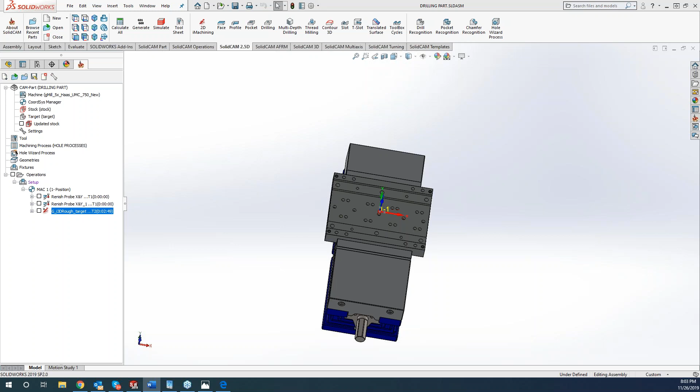Not too much exciting stuff with drilling, but we're going to try to cover as much as we possibly can to make it as clear as possible for everyone. With drilling, you'll see that we have several different styles of drilled holes right here.

We have a tapped hole. Let me get back over to SolidWorks here. So we have a tapped hole, we have some quarter inch drilled holes, some 5/16 holes, some 13/64, and then some quarter inch reamed holes and some 17/64 holes.

So kind of going through everything, with SolidCAM drilling that's going to include your spot drilling, your reaming, your tapping. All that is going to be under the drilling operation for you.

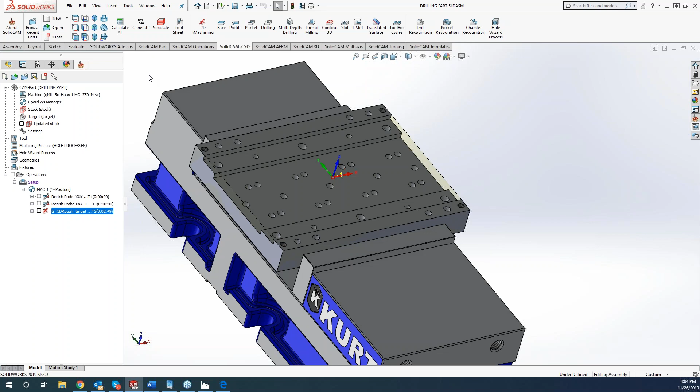So what we'll do is we'll just start off with drilling. Before we get there, you can see we've got my vise here. I probed up my part, my X and Y and my Z, and then also machined off all these areas. So we're right up to size now, and now we can start the drilling process.

So a couple different options for you guys here. We have 2D drilling and we have 3D drilling. Now, once we get into thread milling, which will be in two more classes, I'll cover thread milling there. But what they did in 2019 is they made it very easy to go right from 2.5D, 2D, or 3D drilling right into a thread milling operation without having to jump out of your drilling and create a new operation.

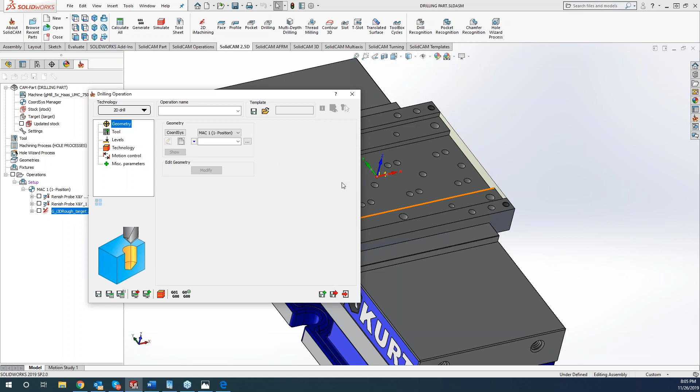So for this part, we are going to be focusing on 2D. We are going to be working on Mac 1 position 1, which is in the center of our part here.

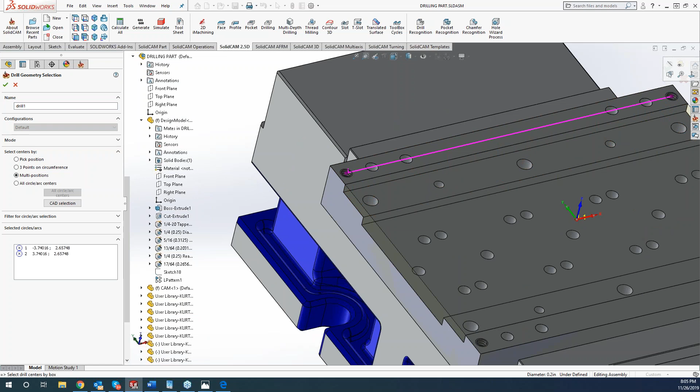Now if I go ahead and grab new geometry, there's a couple different ways we can pick holes. What we can do is come in here and click on each individual hole and grab our holes, and we'll start off with this quarter inch tap first. Or, let me go ahead and delete all these. I can do a filter by size or by radius right here.

I can manually pick a point. So if I wanted to drill a hole right here but there was no geometry, I can just click on that point and it will automatically add that in there for me as well.

So I'll go ahead and delete that one out.

But my personal favorite way, and what I find is the easiest way to go about it, is using your SolidWorks. Usually you will see this minimized up here, so if you would like, go ahead and maximize that down, and come down to your design model.

Now I have all my features that were added in here through SolidWorks. So what I would like to do is grab my 1/4-20 tapped holes, and all I have to do is click on it. I got my geometry here. Click on my 1/4-20 tapped holes, and it will automatically find all of my 1/4-20 tapped holes for me. So I can accept that geometry.

Now I can come in here and modify. I can do shifts for my hole locations, in my X and Y, for each individual hole, or for all of my holes. So if I need to shift these holes by 1/4 inch in my X axis, I can actually shift those over 1/4 inch, and everything will still be linked to it.

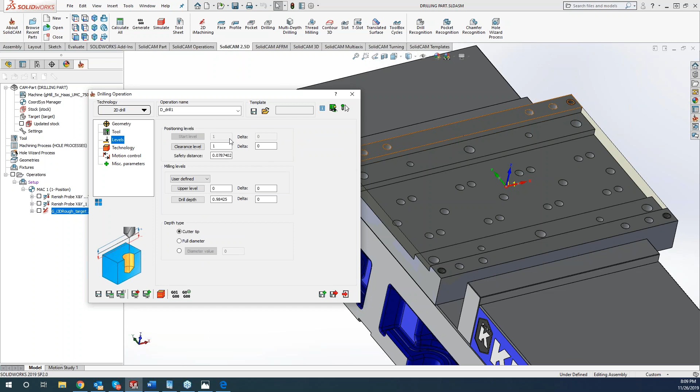Now, our positioning levels we kind of already covered with the face mill profile and all the other ones. But what I like to do in here is, on my levels, my upper level of my part, which is this top piece right there, in my drill depth, since I don't know how deep I want to spot drill out that 1/4-20 hole, I will just put a 0 in there, or I can just click on the surface as well.

Now what I like to do down here at the bottom is, since I know this is a 1/4-20 hole and I want to put a little bit of a chamfer on there, I can come in here and type in 0.27, so we get a little bit of a chamfer on there for when we put our bolts in there and whatnot.

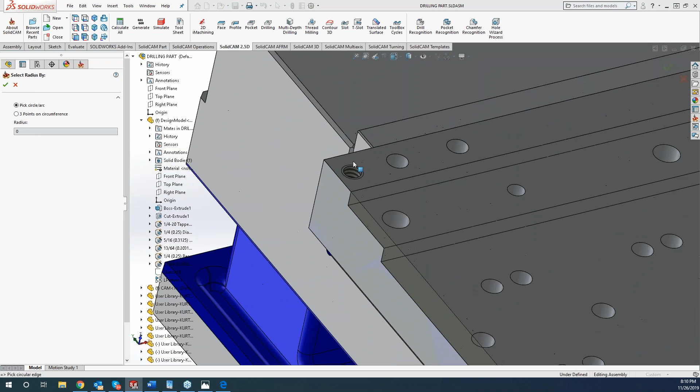So you guys do have the option — if you don't know the value you need to type into that box, but you do have that chamfer feature, you can also use the diameter value button and select directly from the model.

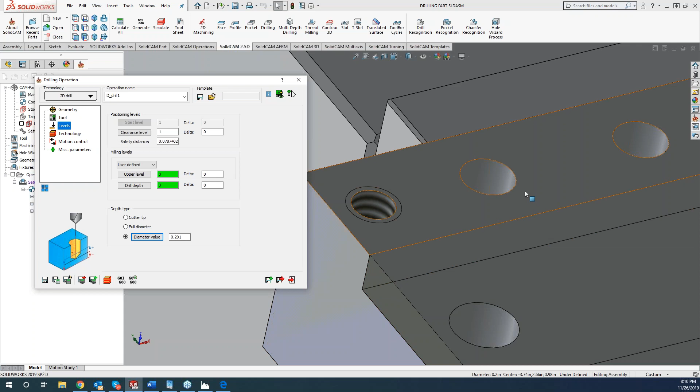So I can come in here and click on the diameter, like Greg said, and it will auto-populate those in there. It's going to go off of the minor diameter, which is our 201 drill. But then you can auto-populate like that. And what Greg is saying is, on one of these other holes, if we actually had a chamfer drawn on there, you can just click that diameter value button right there as well.

Thanks, Greg. We'll do 27. Now, you also have a cutter tip, and I'll cover these shortly, but for right now we're going to tell it to spot drill deep enough to do a 0.27 diameter. Technology, starting over on the left-hand side, this is how do you want it to sort.

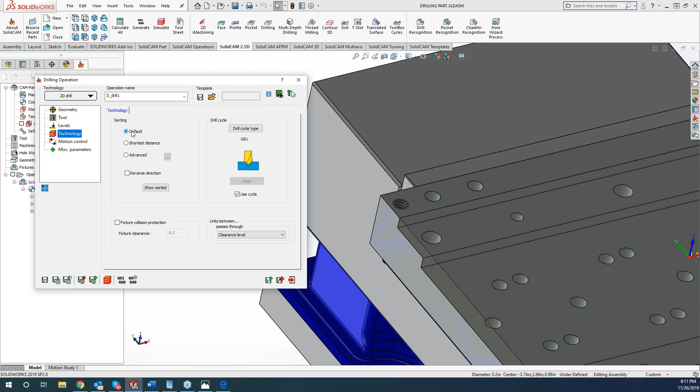So I can do it off a default, and the default is going to go based off of how the engineer drew up the model. So if he chose this hole, then came over here, then over here, and over here, SolidCAM will follow that pattern.

And if you don't like that pattern, we can click on shortest distance, or one I like to use quite often is the advanced option. In the advanced one, I can actually select what pattern I would like it to go, and I can change that tolerance to go tighter or looser to follow the pattern. So we've got kind of a zigzag with a linear pattern, or we can go to the circular patterns right here. So a couple different options to save a little bit of time out on the machine for you.

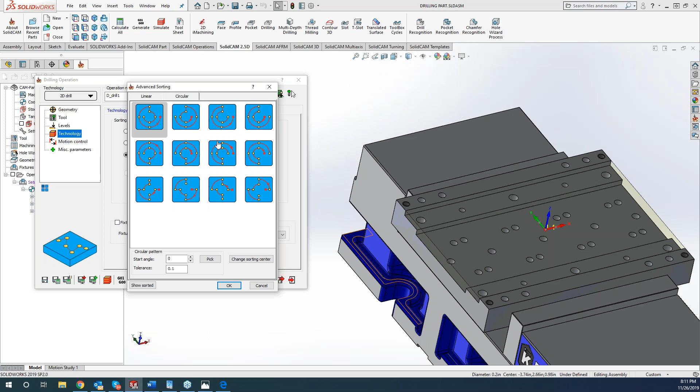Okay, so we'll just go off the default for this one. Now right here, the reverse direction — I'm going to cover that in our next drill operation.

Now here is our fixture protection. So if we have a drill or a holder getting close to that fixture, we can put in a fixture protection. This comes in handy if you're using a vacuum table and you really don't want to drill into that vacuum table. We can put that in there, or for anything to do with your fixture.

Now here is our drill cycles. Depending on the post processor you're using, on your post you may see fewer or more of these options in here. We're using a Haas post for this one.

So I have your standard G81, which is a standard drill cycle. G82 is going to be your dwell. G83 is going to be a peck drill. And your G73 is going to be a drill with a chip break. So for this one, we're just doing a standard spot drill, so we'll do a G81.

Now between my passes, it's going to go up to the clearance level, but I can change that down and lower it to my safety distance, which is being read by your levels right here. So we have a safety distance of 78 thou, or we can have it go up to the clearance. If you guys are looking for high production, I would definitely check that out right there — just make sure you're not going to hit anything as it's going across your part.

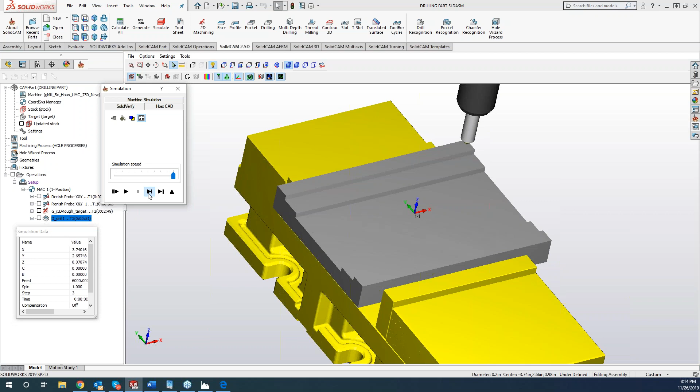So we have our fixture in there, and I can single-step this through. I'm happy with the pattern, and our location is all good.

So now, since I already did a spot drill, instead of having to go through and repick all the geometry again and redo everything for my quarter 20, what I can do is simply come in here and make a copy.

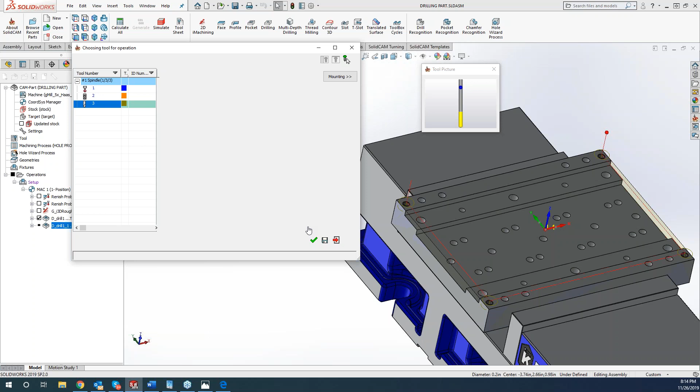Now what I'll do is come and grab the drill that I need. For this quarter-20 hole, I'm going to grab that drill. Now, this is another cool feature: if I'm not sure what that hole or a quarter-20 tap is supposed to be for a drill size, all I have to do is highlight that number and click inside that diameter, and it will auto-populate the correct drill size for me. Pretty nice to have that in there.

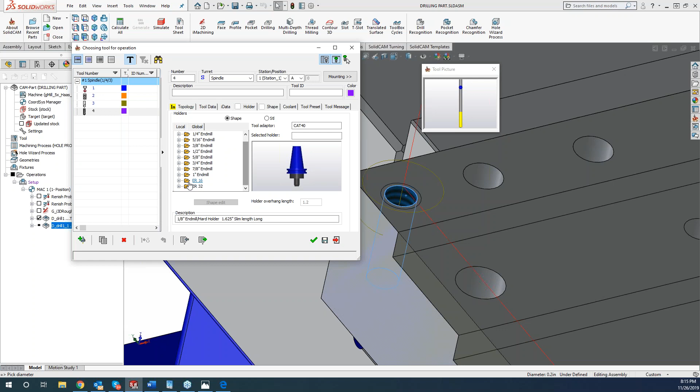We'll go ahead and grab a holder here, and we'll use an ER32. I will uncheck my center drill, and then we will go to our levels. The only thing I need to change up on my levels is my drill depth and my diameter value.

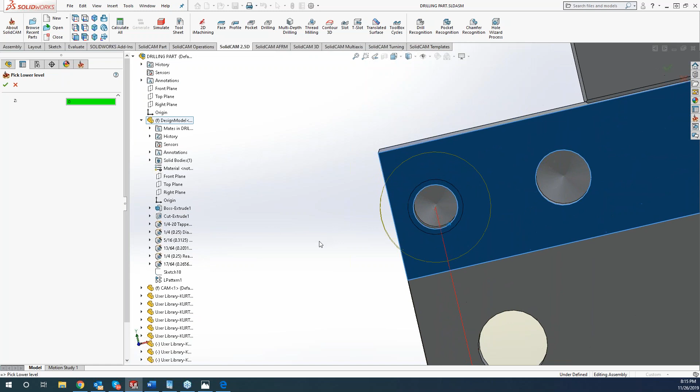If I click on drill depth here, this one does not go all the way through, but I have a good clean point, my drill point right there. So I'll grab that and tell it to use the cutter tip versus the full diameter value. It does all the calculations for you based off the angle, the tip angle, and all that stuff auto calculates for you.

Now in the technology, we'll say that we're cutting some harder material here, so we'll do a pecking cycle, which is a G83. I'll tell it I'd like a peck of 100 thou. Depending on your post, you may have more or less values in here. We can set up our Q peck, set up a first peck, set up a reduce amount, dwells, all that in here.

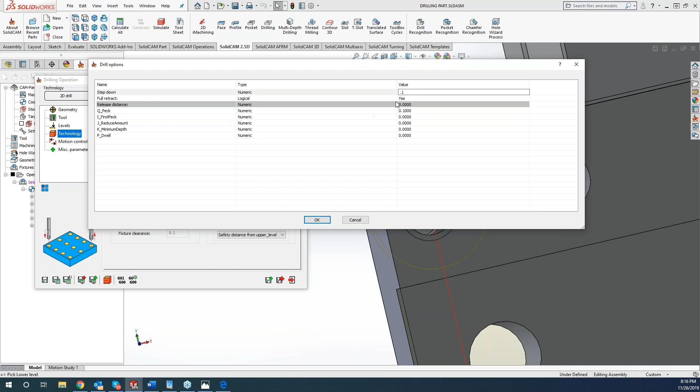Now if you'd like to see the pecking cycle inside your SolidVerify, you'll need to also add this for your step down. The step down won't affect your G-code at all, it's only showing for your SolidVerify. Okay, so now we're doing a pecking cycle.

Now, when it started spot drilling, we started in this top corner over here, went this way and back around. If I do save and calculate again, the drill is going to come over again and drill, drill, drill. But to save a little time, I can reverse the direction. So instead of the table having to move that distance, I can do reverse, and the table won't even move after the tool change.

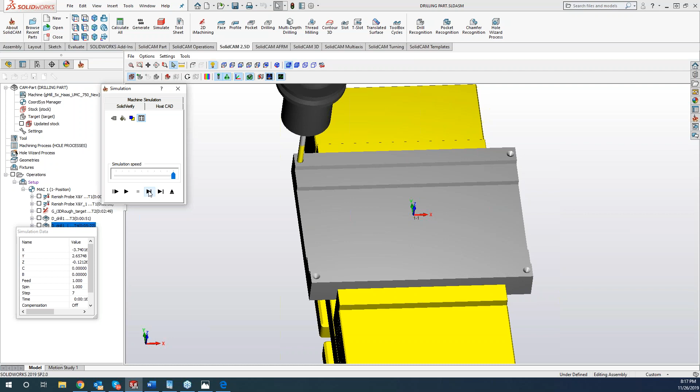So now if we go ahead and do a simulate here, you'll see it left off on the last operation of that spot drill. A little too fast there. So now we can see it spot drilling. I can see I really don't have to worry about my fixture or my tool holder at all. And we're good to go.

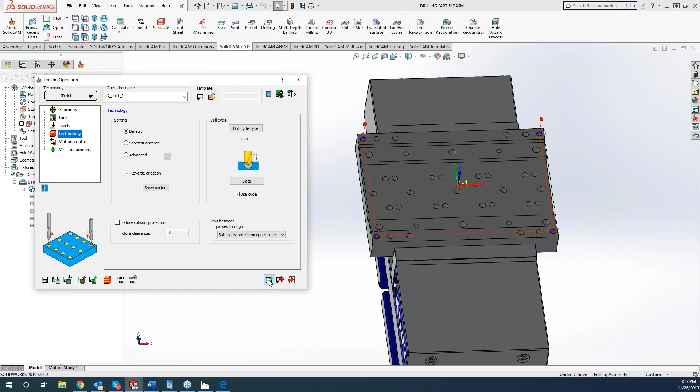So now all we have left is to add our tap in there. What we can do is make another copy, and we will change our drill to a tap. We'll grab a new tool, a tap, and we are doing a 1/4-20, and we'll go ahead and grab a holder here.

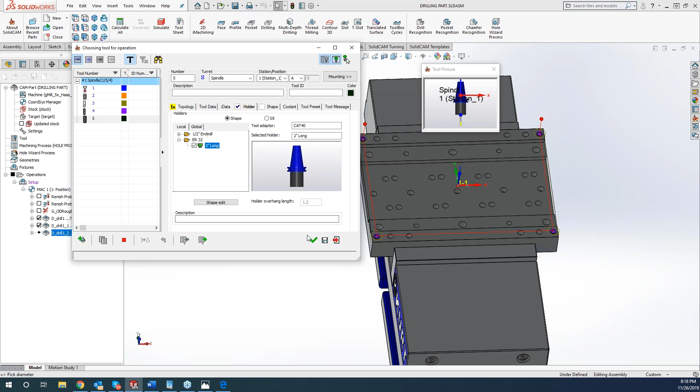Now the only thing we need to change is our drill depth. Obviously I don't want the tip of that tap to go to the exact same point as the tip of my drill. So what I can do is zoom in here and click on the outside edge. That gives me a little bit of room in there for chips that get underneath to compact, so we have the entire drill bottom to compact chips there.

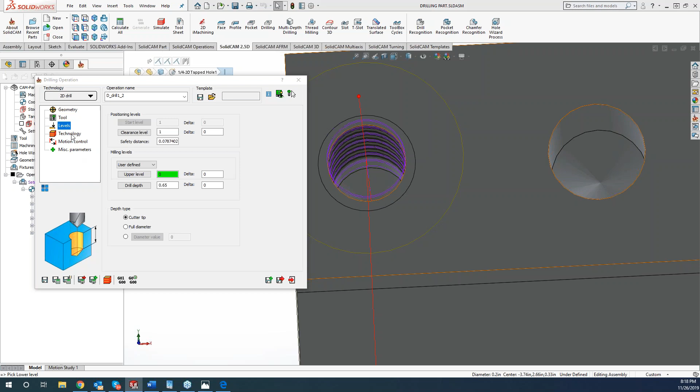Once again, I'm going to reverse my order to save a little bit of time. I'll uncheck this now, and we can have a G84 pecking tapping cycle with this one, and save and calculate. I'm going to hop out of here and play all three of these through so we can get a good simulation of what's going on.

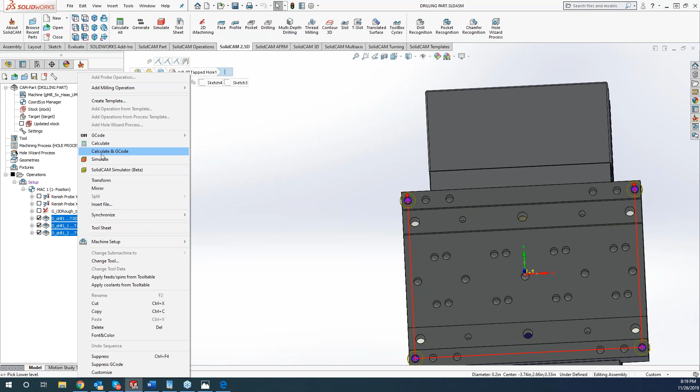All right, so we're spot drilling. We're drilling. Pretty exciting stuff, guys, isn't it?

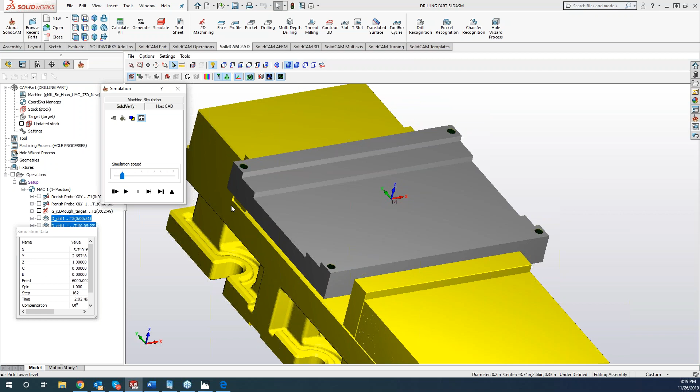And now we ran our tap through. If I look at this, I can see I got a nice little chamfer for my thread relief on there. I saved myself a little bit of time by keep reversing the direction. Pretty nice and simple to do that.

Now I'll go ahead and turn off that toolpath. We'll grab our just regular 1/4 inch. What we can do is either start right from my spot drill and add a new operation, or add it at the end, and then we can combine all the spot drills together at the end. So we'll go ahead and do a drilling again.

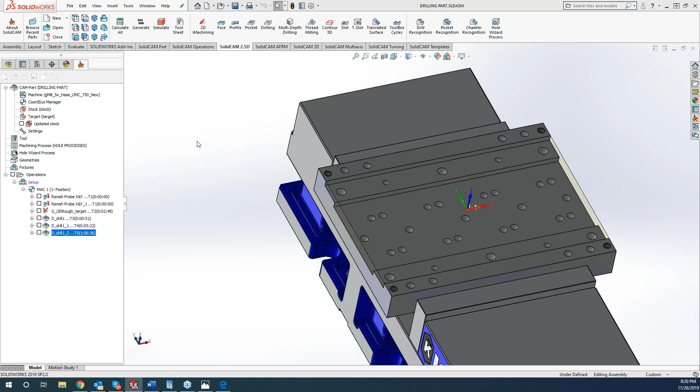What I'm going to do is work my way right down the list. So I'm going to grab my 1/4 inch holes. That one doesn't say reamed, so I don't have to worry about it, I can just do a spot drill and a drill. I'm going to reuse that spot drill that I used before.

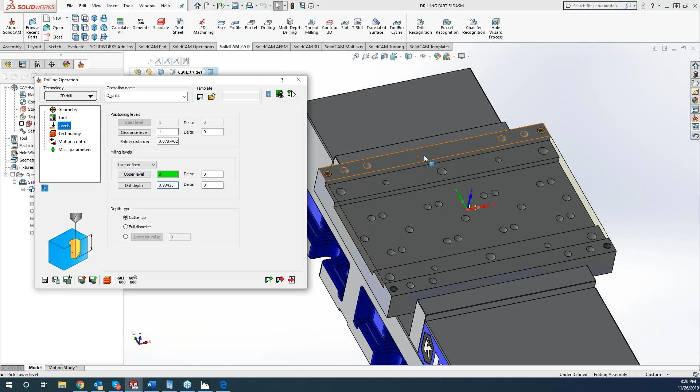Now my levels, my upper level is going to be 0, my lower level will be 0. And I would like to do a 0.26, which gives us a 10th chamfer on there. Save and calculate, and then I can come in here and do save and copy.

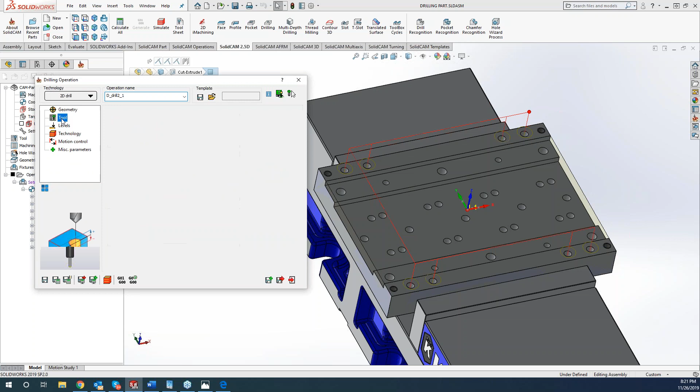First thing I will do is select and add a drill. Like I said, if I don't know the size of it, I can just click on the diameter of the hole and it will auto-populate for me there. And we'll go ahead and throw a holder on there.

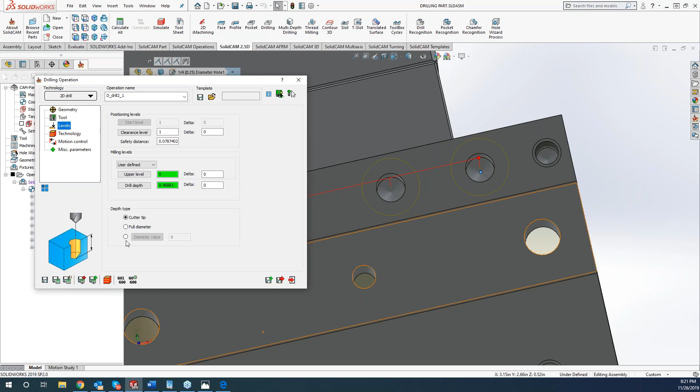Now, with that level, I want to drill right to that tip. There we go. Now, another way of going about that, since I have a nice clean view of my full diameter, I can also turn it to full diameter and grab that depth as well. You're going to get the exact same calculation there.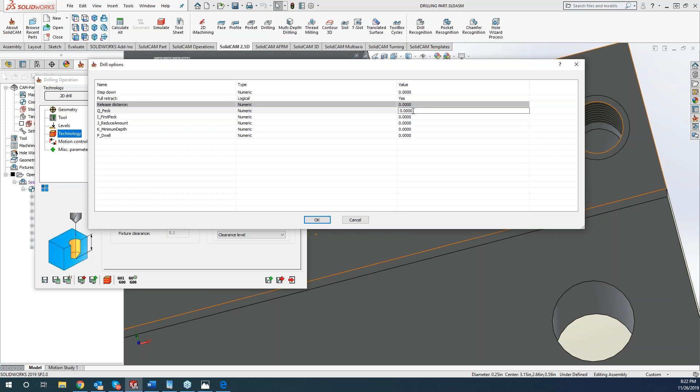Technology-wise, we'll go ahead and peck it out, and I'll do 100 thou peck. And I will reverse the direction to save us a little bit of time here. Now, I just want to double check my spot drill real quick to make sure I had that center drill turned on. Yep, so I'll turn that center drill on. There we go.

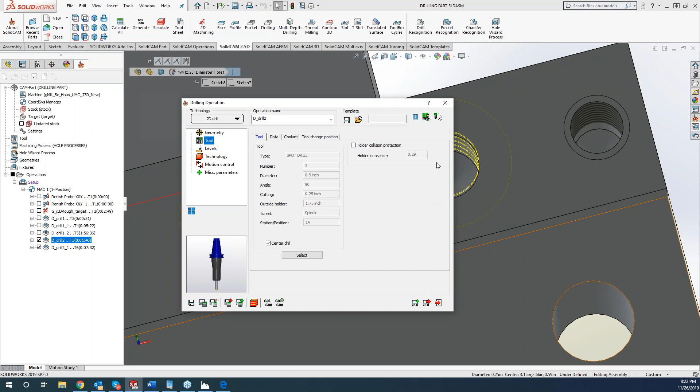All right, so we have those holes done now. Once again, we can start our drilling operation and we'll just keep working our way down the list here. So now we can go to our 5/16.

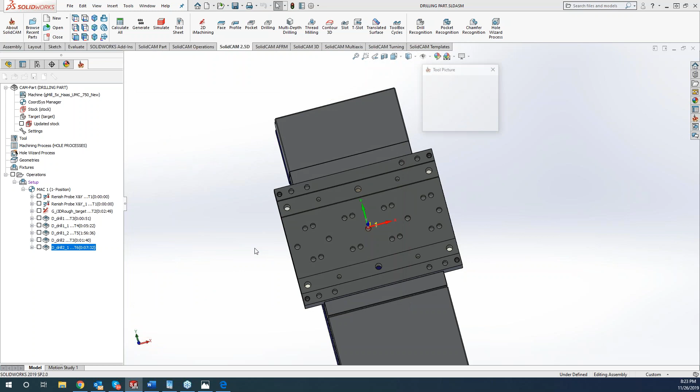Since that one has been machined off at a lower level, my upper level for that spot drill and my drill is now going to change. So if I go to my levels, my upper level is going to be this face, my lower level is going to be this face. I already forgot what size I'm drilling, so I'm just going to grab that hole, and we can add an additional 10 thou chamfer on there. Save and calculate.

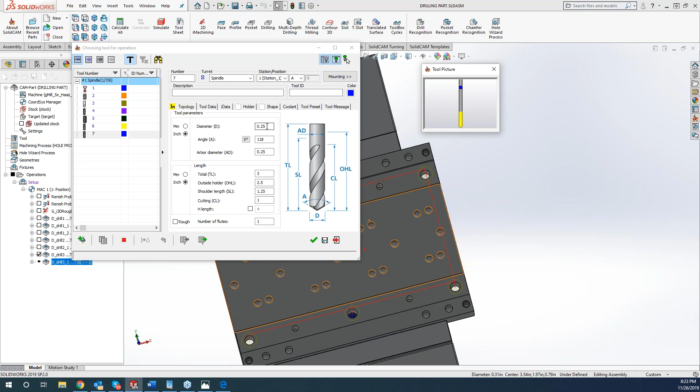And we will make a copy again. Add a new drill. Got our 3125. Grab our holder.

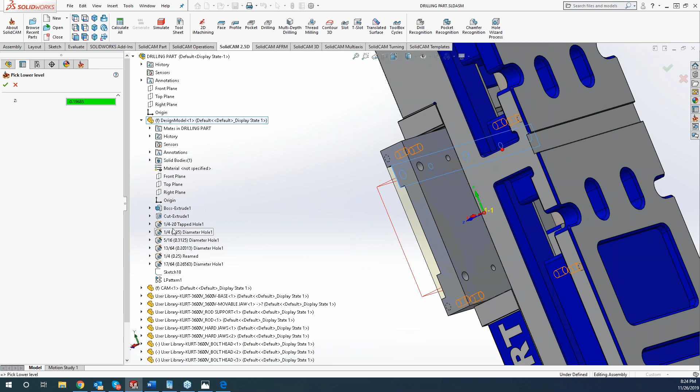Now I'll go to my levels. My thread depth is showing through, so I can just click on the bottom of the part there. Now on this one, I'm definitely going to want to do full diameter, and it's going to go to the full diameter of that drill. But if I do that, I'll sometimes get that plug that's stuck at the bottom, so I'm just going to go an additional 20 thou past. By using the delta, I can go either deeper or shallower, all based off of the delta. You can see I'm showing a negative with the arrow, an arrow down here. So I'm going 20 thou past.

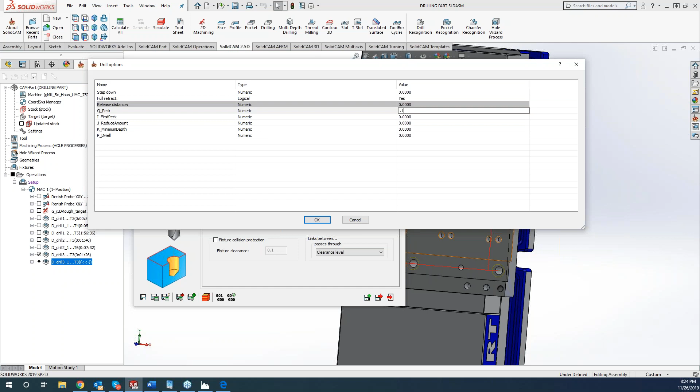Now with this one, we'll use a pecking cycle again. 100 thou seems to be the good number for tonight, so we'll go with that one. And then I will reverse the direction again. Save and calculate. And if we would like to see those two, we can simulate both of them, and you can see our previous operations are still there.

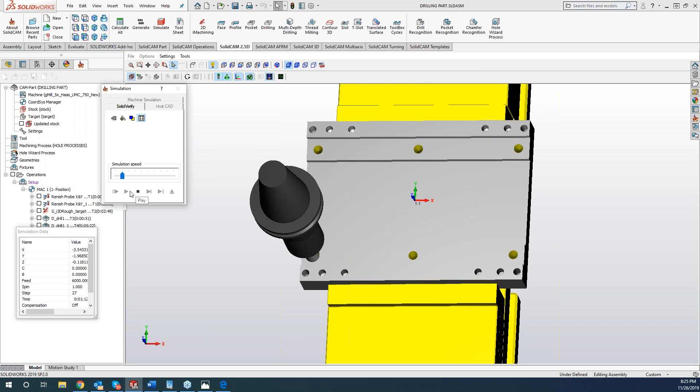This would be a good one, especially since we're doing a through hole here. If we're running parallels underneath here and that drill is getting close to the parallels, mark that as your fixture and use your fixture detection in that way as well, because we hate drilling through our parallels, and we've all done it before.

At least I have, Greg.

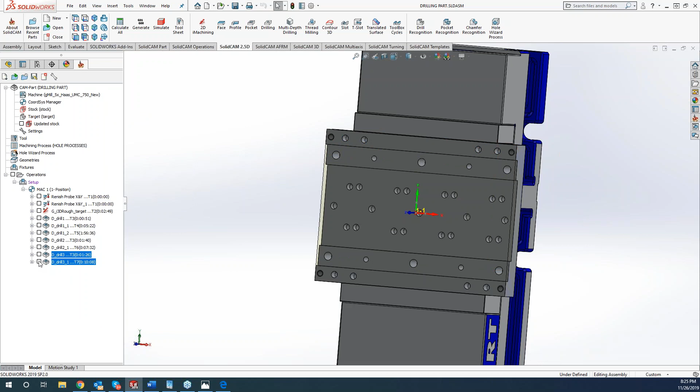Drilling, and we'll go to the next set of holes.

So we got our 5/16. We can do our 13/64 hole. See how much easier that is grabbing that geometry instead of picking everything.

One thing you can do is if you have all the holes that are the exact same on one surface, you can actually click the surface as well, and it will grab all the holes. But we can't do that in this case because all our holes are different sizes.

Now when we get into drill recognition and the hole wizard recognition, that process gets much easier. With drill recognition, which we'll cover too, I can click all of these holes and spot drill them to the correct diameters, all on the correct levels. Drilling has to be done on the level that you're working on.

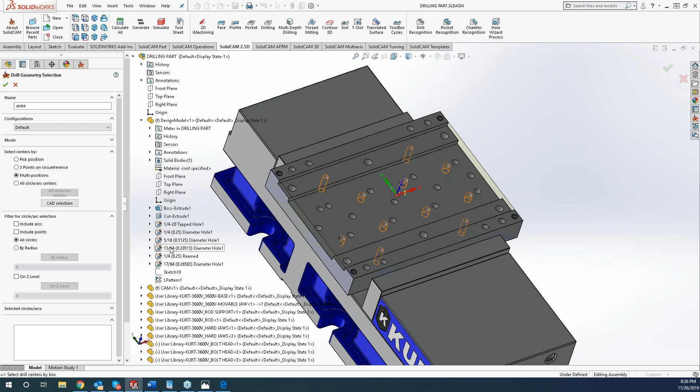All right, so do the 13. Actually, we'll just skip over that one, that's just boring. We will go to the reamed holes now.

We'll go ahead and grab a spot drill. Our upper level will be the top there, and our depth will be the exact same top. Oh, that was a 1/4 inch, so I can just type in 0.26. Save and calculate.

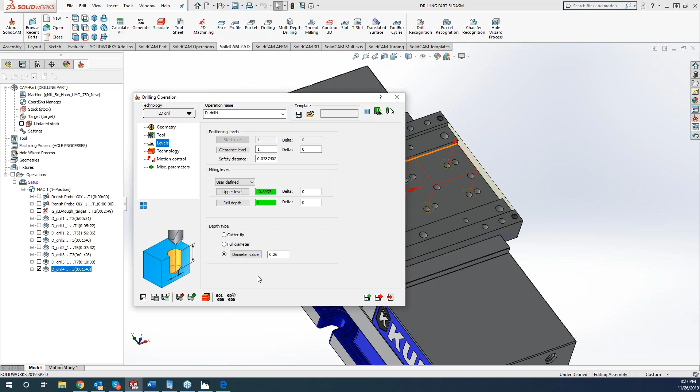And now I will make a copy. And we will go ahead — oops, actually, I forgot to do something, sorry. Forgot to turn on my center drill.

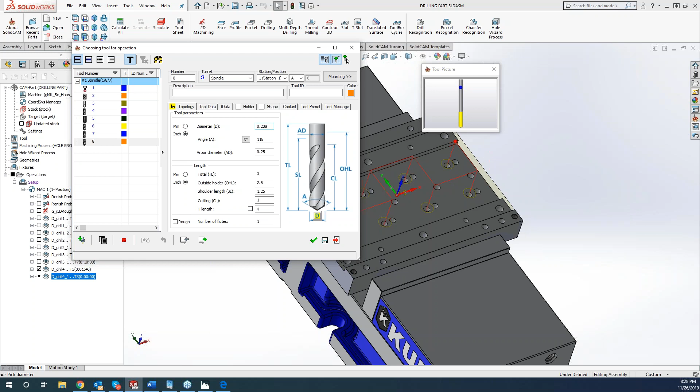And now we'll grab a new drill here. I don't have a drill tap chart right offhand with me, so we'll do a 238 drill because we're going to be reaming that one out. Holder.

Levels, we'll change that up. So now my depth — get our part flipped around. Nope, that's a blind hole. So I can come in here, and I want it to do cutter tip. And technology, we'll switch this over to pecking.

And I'll reverse that direction to save us a little bit of time. Now, maybe in this process...

Oh, actually, I forgot to add my reamer. Sorry, I'll hop back in there. And we'll make a copy again, and we will add our reamer.

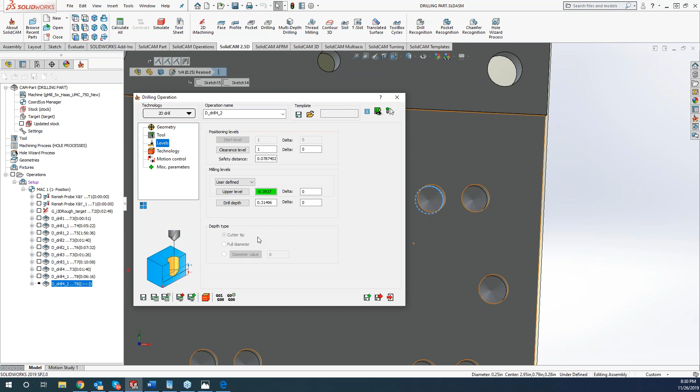0.25. Grab our holder, and go to our levels. Now, obviously, I don't want the tip of the reamer to be going down to the tip where I left off with that drill, so I'm going to go right to the size right there. The calculation is going to be automatically based off of the tip of the reamer. So there's no option to do full diameter or diameter value, just because it is a reamer and it will recognize it as a reamer.

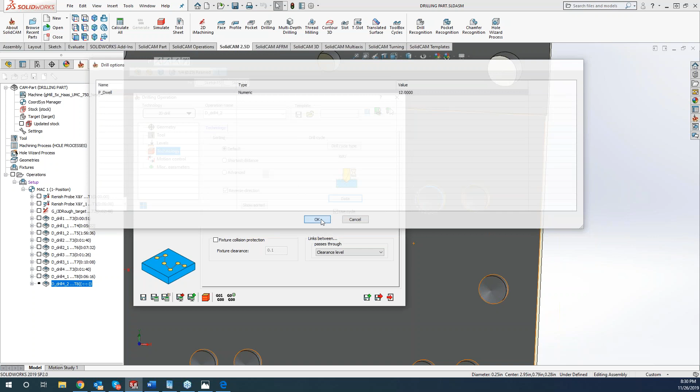Now on this one, we can do a G82 with a dwell, and we can have a dwell of, let's just do 12. And now I can unreverse that, save and calculate.

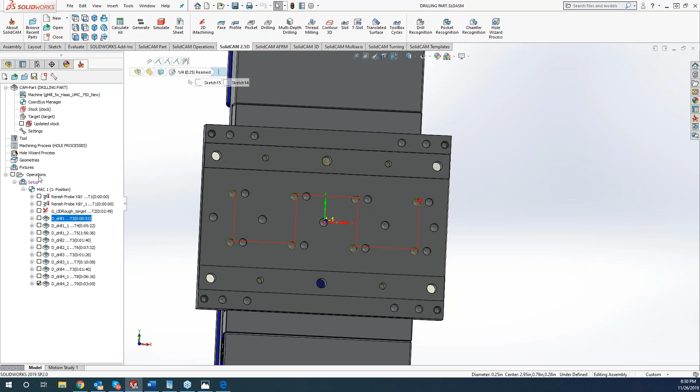And now we're basically done drilling out all those holes. So what I can do now is come through and reorganize these. All my tool number 3s are all my spot drills, so I can highlight those and drag them up towards the top, or I should be able to go to my operations here.

And if we do — I just got to find it, sorry. Unless I got rid of it in here. Oh, shoot, let me see if I can find it in here. Automatic sorting. Okay, so now, should be able to come in here. I just got to find where it is now. Automatic sorting.

And I would like to do sorting: use all center drills first. And I can click OK.

And now it didn't do it. Automatic sorting. Apparently I have to split them, which — okay, there it went. So now I have all my drills at the top and they're all right together.

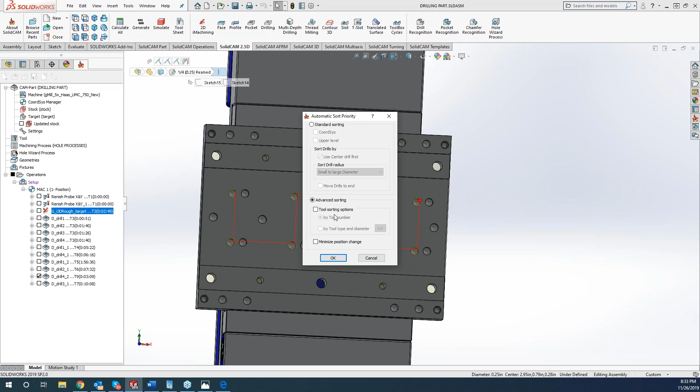So that's a good way of doing it. You guys can also do an advanced sort, off of tool sorting options, minimize position changes, all that as well.

So I have everything done. Let's go ahead and play it through here. Oh, we don't need to show the probing on this particular one.

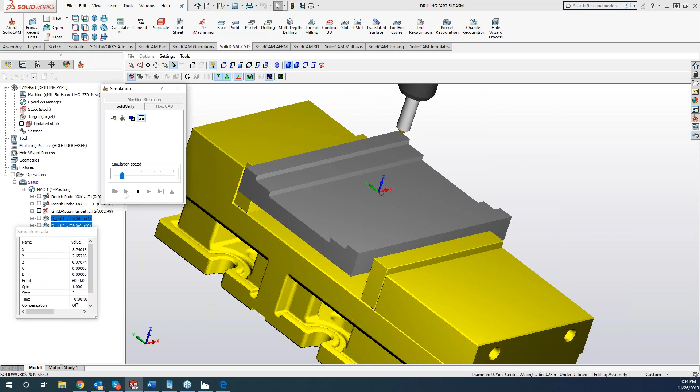All right, so we got our part. Those are the spot drilling. We're doing our drilling. And we're doing our tapping and reaming now. So pretty slick.

Greg, did I miss anything?

Must not have. He went silent on us.

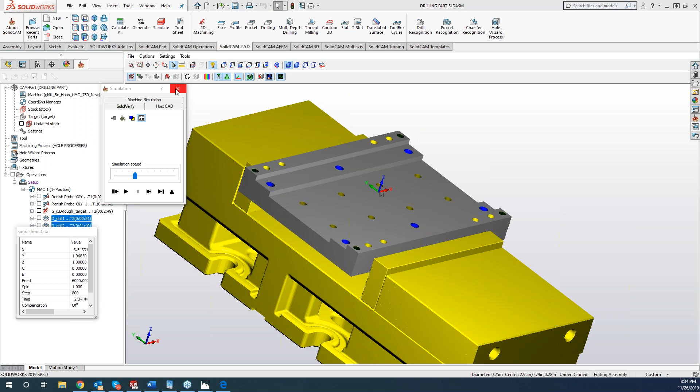I know you were going through each individual pass for emphasis, but for repetitive tasks like this, maybe you can go over the different strategies for duplicating these paths and making it faster and easier to generate this amount of toolpath. That was going to be my question too, Kevin. Is there a way to generate this if you have different pockets where you could do it all at once and then move on to the next one?

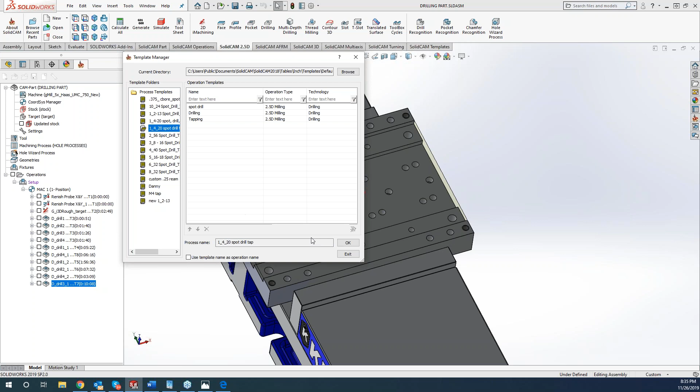Kind of, absolutely. So what I've done is created a template for a quarter 20. With that being said, I can come in here, add an operation. I need to do it for my process template. I'll grab my quarter 20 spot drill tap, use the template name, and hit OK.

I can click define, come over here and grab my quarter 20, hit OK. Now what I just did is spot drill and tap all those holes, all based off of a template. So like Greg was talking about, our grouping - spot drill, drilling, and tapping - is something you use quite often. Just right click on it and create a template, and you can create that template for whatever you're trying to do.

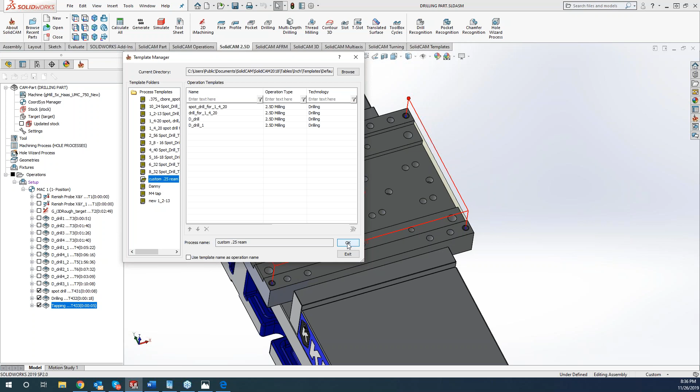Same thing with my reamed holes - instead of going through that entire long process, I'll show you the old school way before the cool ways: add operation from process template. I do my custom quarter 20 or quarter inch reamed holes, click define, tell it to do my reamed holes, and hit OK. Now I've got a spot drill, ream, and must have a chamfer in there from a previous time.

This is what you have in your shop, this is what you like to see, all that stuff. It makes it so much easier. So I just did all my quarter 20 tapped holes and my quarter inch reamed holes within a couple mouse clicks instead of having to go through each individual operation itself.

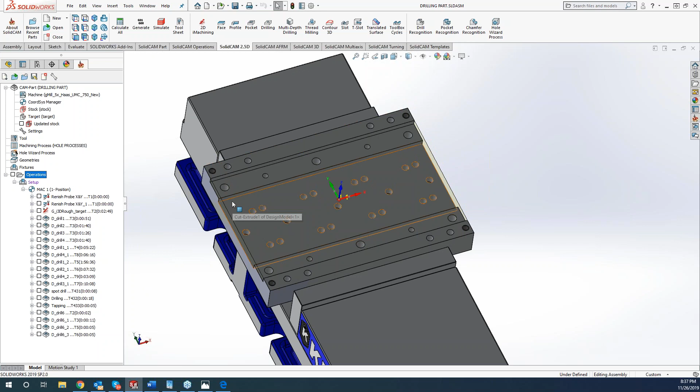Is that where you're kind of getting at, Greg? Yeah, absolutely. I was thinking about that, and also doing it without process templates, where you grab the operations from a local CAM tree - spot, drill, and ream or tap, whatever it may be - and do a copy and paste out of the CAM tree.

So what we can do is highlight everything we're trying to group together, hit Control C, or right click and copy. Now I can come down here, do a paste, and very simply change up my drill geometry to something else. So it's another way of going about it.

Now, once I get into... I'll just delete these out real quick and get back to square one here. Once we get into the automatic stuff, there's an even easier way yet.

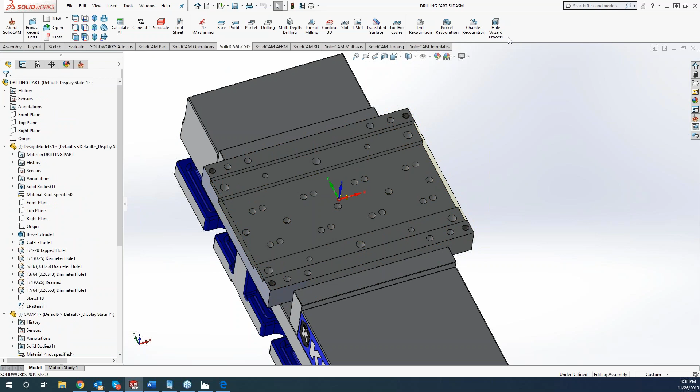I'm not going to go too in depth, but since we're inside SolidWorks and all the holes were created using the hole wizard process, I can come up, click on hole wizard, and tell it I want to do all those holes. It will find all those holes at different depths. Getting back to my SolidCAM tab here, it automatically spot drilled and tapped, all based off of the SolidWorks hole wizard. So whatever was specified by the engineer, all that data gets pulled over into SolidCAM for your spot drill and tap. But we'll get into that when we start covering feature recognition.

All right, anything else I'm missing? Or Daniel, any questions? No, not at this time, just kind of taking it all in.

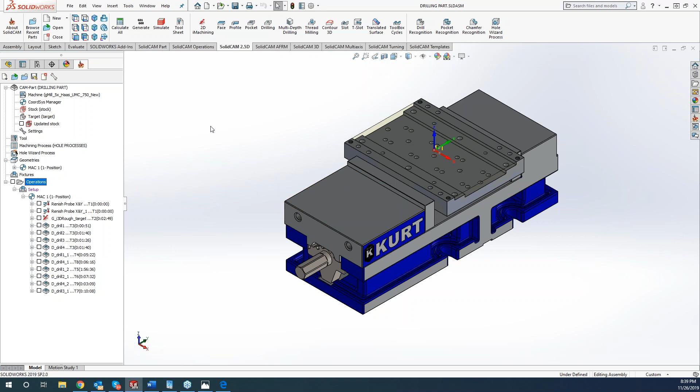So let's go through from the start with probing our part, and I'd like to run this last one through machine sim for everyone.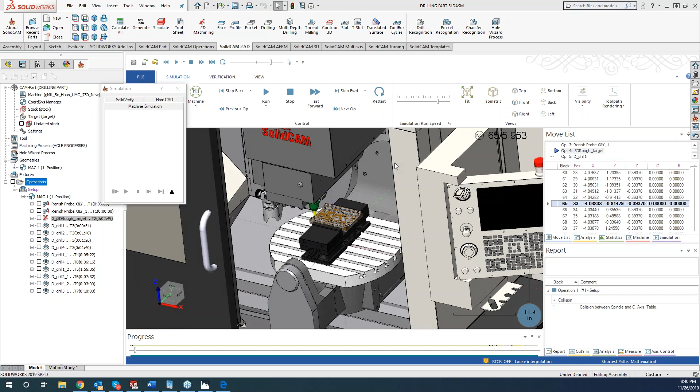All right, so let's get zoomed in here. Oop, went a little too far. All right, so I'll slow this down and play it through.

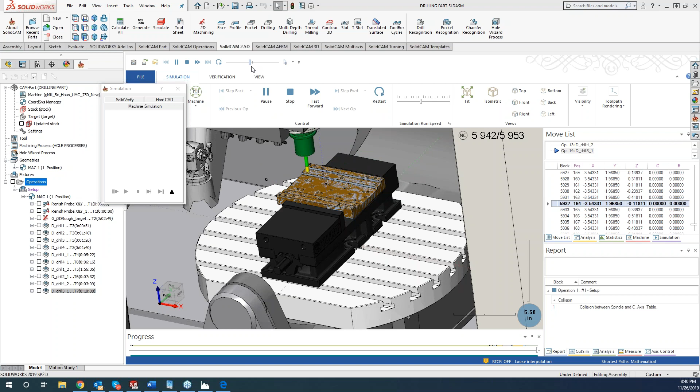So we're probing up our X and Y, probing up our Z, and then we're going to machine off all our material there, spot drilling, doing all our drilling, doing our tapping and our reaming. And we are done with the final part.

Now, one thing I want to start showing everyone is the setup sheet. So if I want to see the tools that were used, we can do a setup sheet here. What this will do is populate all the tools used in this program, and you can set it up as a Word document, an Excel, whatever you guys would like, or HTML.

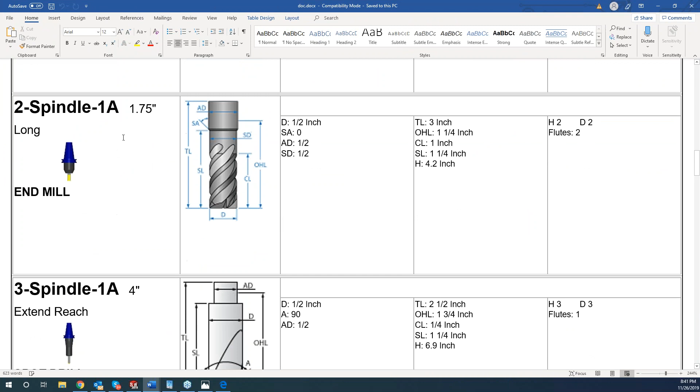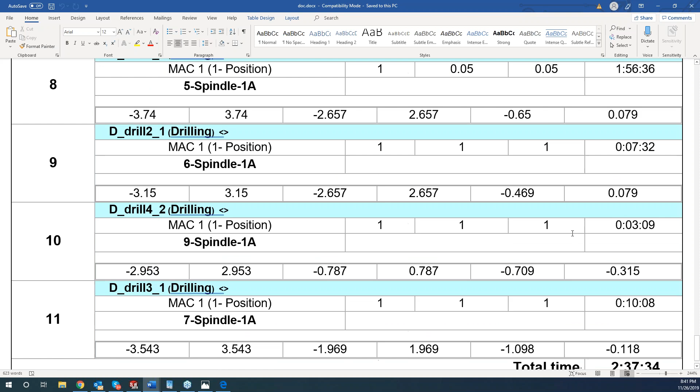It just takes a second to pull up the Word document. And it pops over to my other screen. The nice thing about this is I have all my tooling, my probe, my tool holders, my tool length offsets all done right there, as well as cycle times for each one too. So if you guys didn't know about that, it comes standard with SolidCAM.

All right, well, that's pretty much drilling and everything there is to know about drilling in there for everyone. Hopefully you got something out of it. Greg, got anything that I missed before we wrap it up here?

I don't know if you were planning to cover this tonight or in another class, but the new feature in 2019 where we have automatic part avoidance for retracts, like if you had a rib in your part and holes on either side.

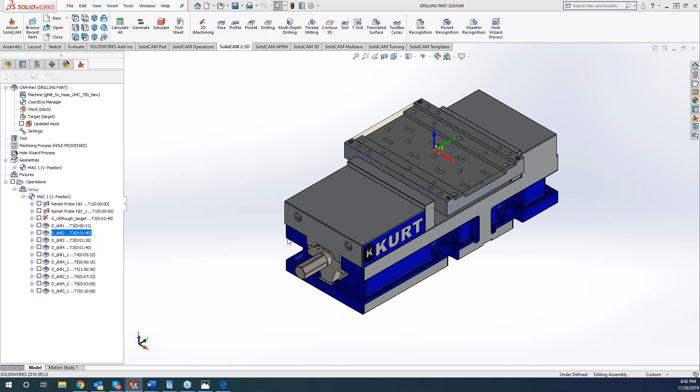Oh yeah, that's right, forgot about that one. I just got to find it here. Yeah, I don't think the part on screen lends itself to displaying it.

Tell you what I will do is when we cover 3D drilling, I will show you guys that, or the 4th axis drilling. And boy, I'm having a heck of a time. Maybe it just won't show because there's not a rib in there.

I think you're looking for... it's part of it's on the levels page, but the milling level is going to be automatic instead of user defined, by updated stock. Yep. So this one we don't have any ribs in there, but what it will do, and thanks for pointing that out Greg, is it will automatically find based off of the updated stock.

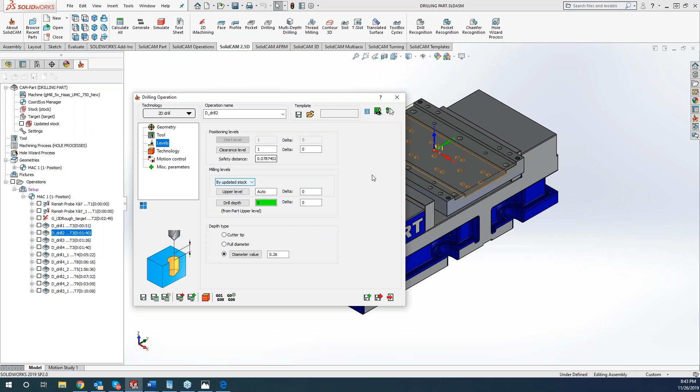So it will stay down within safety, but if we have a large rib going through the middle of our part here, it will see that large rib and go up and over that rib, then keep the tool down going all the way through. This is really good if you have a lot of ups and downs, or like we were saying, fixtures as well, to keep that tool down inside the material versus always having to go up to the clearance.

Great point, forgot about that one. I promise I'll show you guys that on 3D. I'll make notes so I can have it all ready for everyone. Anything else I missed out, Greg? No, I think that pretty well covers it.

All right, Daniel, or Dan, you got anything? No, I think you nailed it on my end as well.